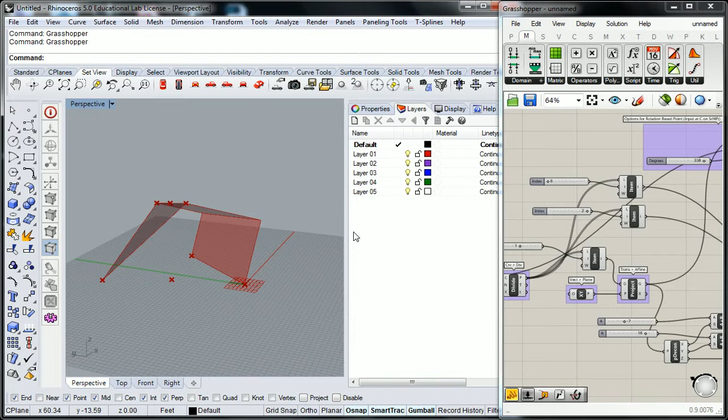So the first thing I want to do is go back into Rhino. I know this is a rarity with me, right? So go back into Rhino. We have a bunch of layers, right? I don't know if yours came up defaulting to 5 different layers, but mine did. If yours didn't, go ahead and create 5 different layers. I know you know how to do that, Jeff went through that with you before. So we're going to actually create 5 different layers.

You don't really need to know much here, you guys. What you do need to know is how to get all of your geometry in one place, and there are easy ways to do it. I'm going to give you the basic way, and there are very clever and complex ways to do it too.

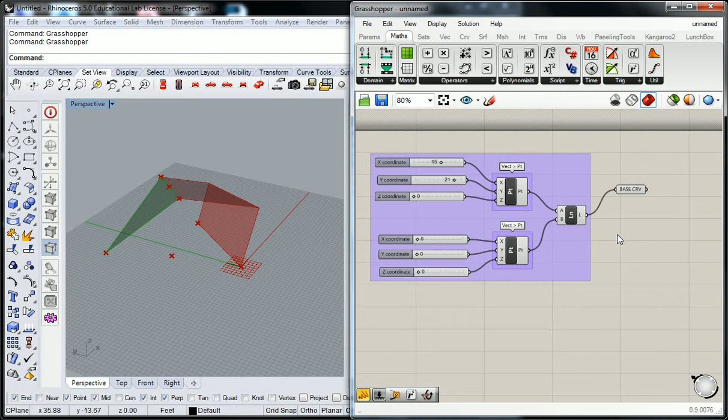But the basic way is to just grab them all and connect them to one particular component. So remember I mentioned I've got the basic geometry creation stuff up in the top corner. I do the same thing for baking geometry if it's a very simple definition, and it looks like this. So I'm going to go to params, and I know all of these are just surfaces, but generally I can do a catch-all and say geometry.

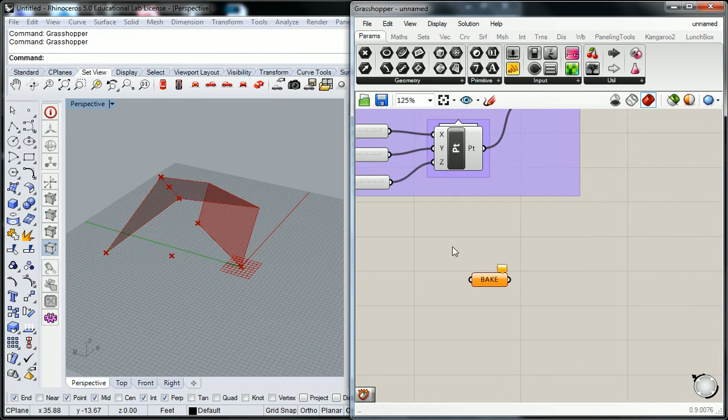And I'm going to call this one 'bake.' There are buttons and stuff you can do to bake each one individually, but this is just going to be easy for me to reference.

So now I'm going to do the same kind of wireless connection thing, but backwards. I'll take this one and set it to wire display hidden, and just go like this. Notice how when I pull it out to the side, it gives me that crazy wild wire wrapping back onto itself thing, that's why I just hide it. It's just an easy little catch-all.

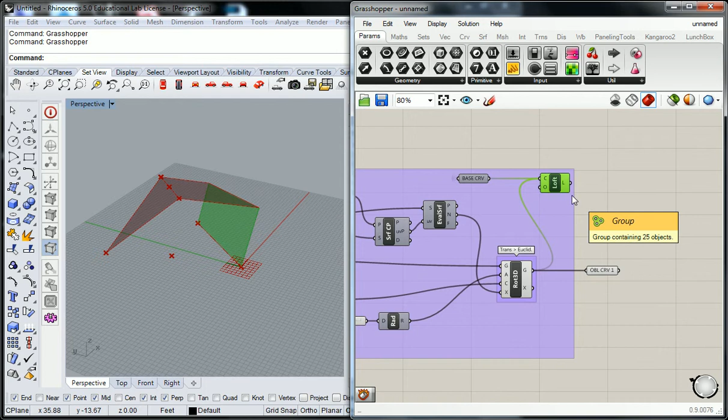So I need to bake the surfaces. That's why my geometry, the surfaces themselves, were created but not used, right? Notice how every single time I had this loft over here that was just kind of sitting there, that's the one I'm going to use to bake. So I'll pull this over here and plug that in.

Can I see a connection for baking? It's just another bake right there. Do you understand? Yeah, so it's just this. I made a wireless connection from one to the next, except I did not take this one out. I took the first one out because it's going to collect and feed backwards now.

Don't worry, there are other ways of doing this too. I'm just showing you a simple way. So I plug bake in there. I can make a copy. I'm sorry, no, don't make a copy of that. Make a copy of...

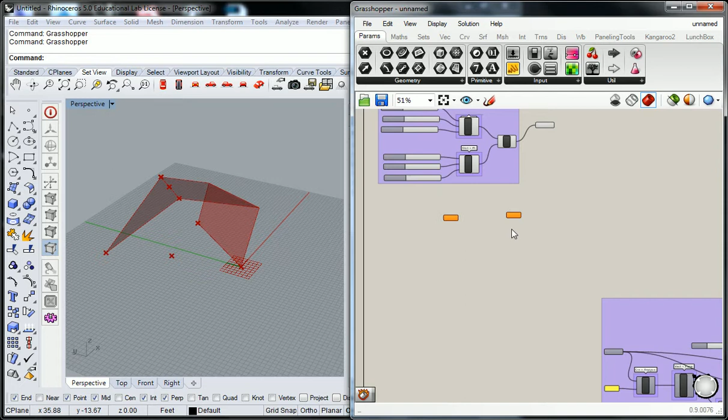Oh, I forget my workflow for that. I think I remember. When I was doing it this way, I just made a couple copies back here. So I did that, and I said copy, paste, paste, paste, paste, and I just feed them in.

Again, there are smarter ways of doing this. I'm just giving you the quick one. Wait, what? Oh, shoot, sorry. I did it wrong. You gotta hold shift.

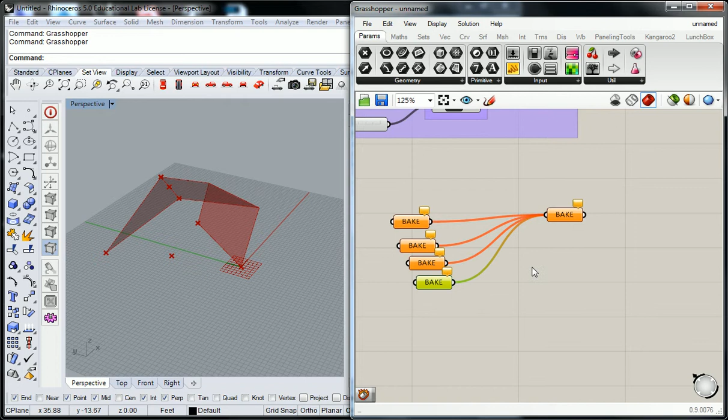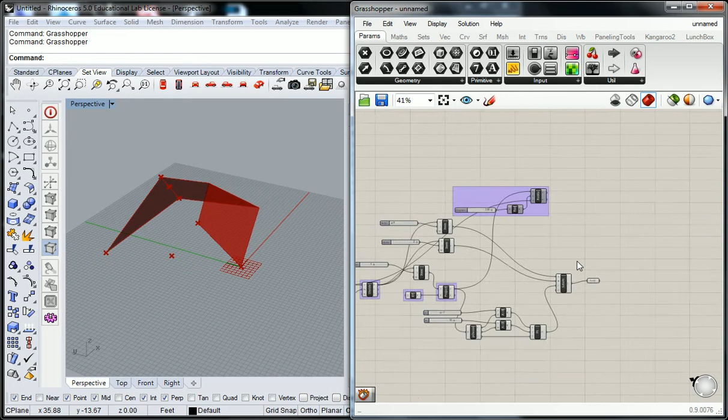Alright, so you should only have 3. You might have 4, but you can just take one of these to each one of your definitions. So I got one there, I've got one here, and I've got one that's going to be all the way over here. So this one feeds into that, this one will feed into that, and this one will feed into that.

So now when I select this bake, it selects all of that geometry. So I essentially could technically turn everything that I've created here off, even this, off, and what I see is my completed form right here.

Yes? Yes, thank you.

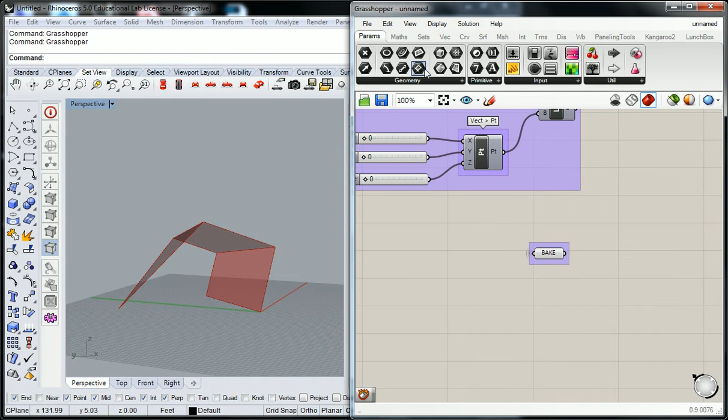So I'll go through that again so that you can see it in a little bit more clarity. I used geometry because geometry will catch any geometry that's created. It doesn't matter what type, it'll just take it. So I used geometry.

I called it bake. And the key really is your method and foresight for knowing how many connections to make. So I did it sort of as a backward wireless connection, and I connected these two like this, and I made that wireless.

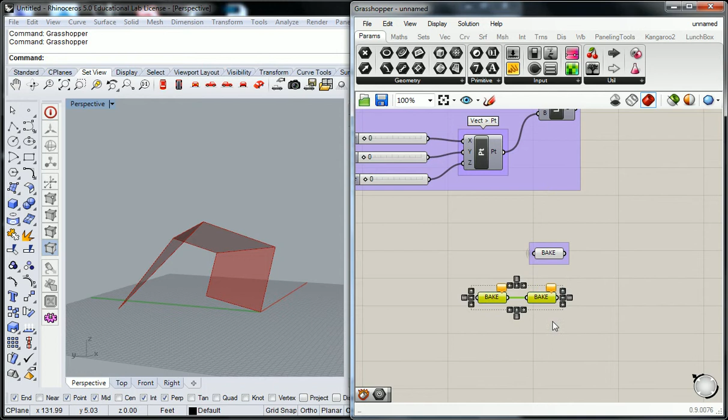Am I still going too fast for you? Or you got it? So this connected to that, it's wireless.

So then to make a few of them, I made a mistake and I just did copy, paste, paste, paste, and then those weren't connected. So what you want to do is just copy, paste, and then hold shift and put it in. So that way you've got both of them connected, and you can just carry them out to collect.

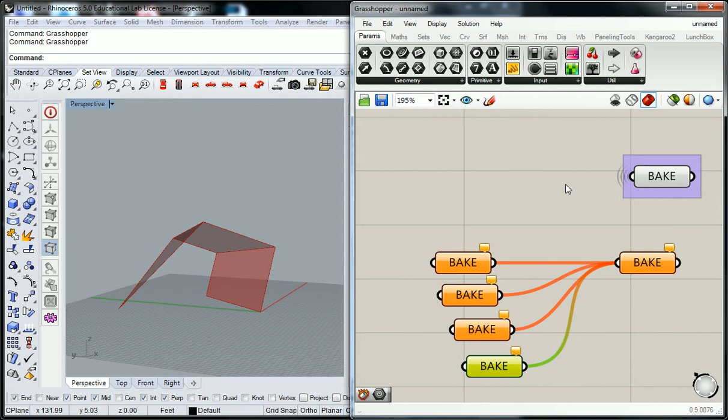This is kind of like amateur hour, but it's the easiest one to remember, I think. So now I've got a bunch of them. They're all connected. This one's going to stay as my collector. And so I'm just going to bring these out and connect the surfaces that I've created.

Okay, so I can bring them, see here, if you follow and trace them down, it's hard to see, but you know, the bake collector's up here, and I just pull each one out to where I had the loft, the surface that I actually created.

So we need 2 of them? 3. Or, well, I'll say you'll need as many of them as you have surfaces, because we created each surface individually.

And if we want, it doesn't matter whatever new plane that we make. The only thing we have to do is just plug in the previous plane into it. We just have to make sure that they're synced up. So it doesn't matter how many different number of planes that we have. We just have to make sure that one of the connections is plugged into the previous plane.

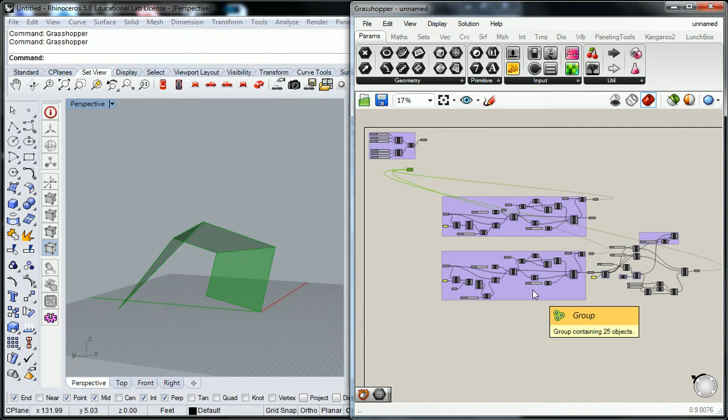So I think it's locked. No, so these lofts do not have a relationship to one another. If you follow this through, right, the oblique curve is the only one that feeds down into the next surface. This loft goes nowhere.

I put that loft there, A, because I wanted to see the surface I was making, and B, because I wanted to use that surface to bake into an actual physical surface in Rhino later.

It depends. You could, but like I was saying, the reason I use curves to rotate is because if I create a surface like that, it has a rotator here and a rotator there, and then I want to create another one that goes out this way.

The relationship of this surface to that surface is not a rotational relationship. Because if I rotate the surface, that turns this into an axis of symmetry, which means the resultant surface is going to look like this. Do you understand why?

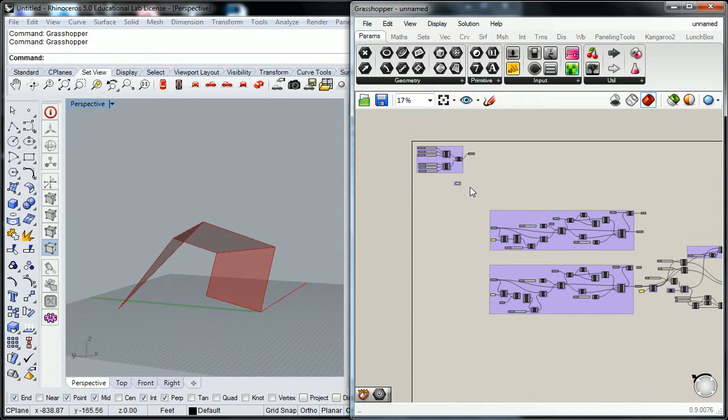Sorry, I need to do that. So basically, sorry, you guys keep asking me questions. They're good questions, but I get lost.

After you do this, the baking part is so easy, right? All of those surfaces exist right there. All you have to do is right-click it, go to Bake. By the way, I don't know why they chose an egg for the term bake, because you don't bake eggs, right?

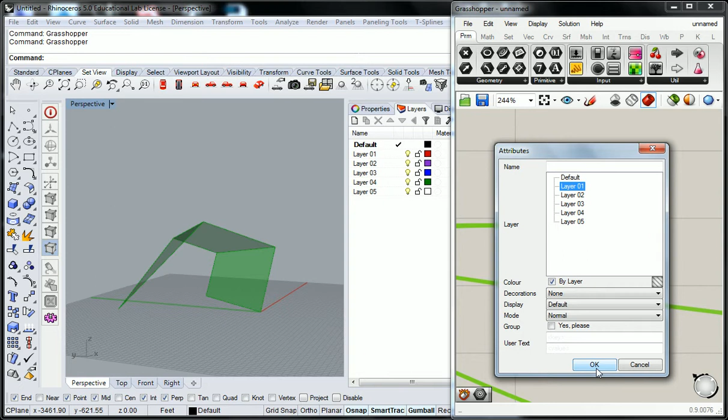All you have to do is just pick the surface it's going to, and then it'll assign that version. It'll bake it out into that particular... did I say surface? Pick the surface it's going to? No, pick the layer it's going to. My bad, working in Grasshopper too much.

So now you see it actually created that surface. If I turn this off, you'll see the geometry in Rhino. There you go, so the geometry here is in Rhino. So the very quick and easy way of doing this, it becomes so easy.

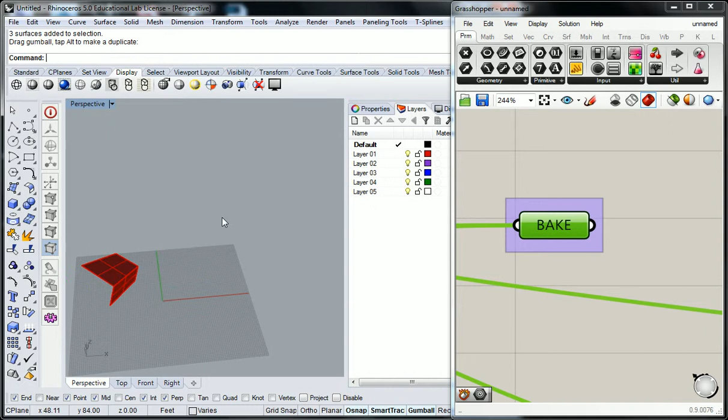So I'll do them all really fast. I grab those and pull it off to the side. So you just grab the surfaces and pull it off. Then I can go back to all of these sliders, right? So let me turn the bake on so I can see what I'm doing.

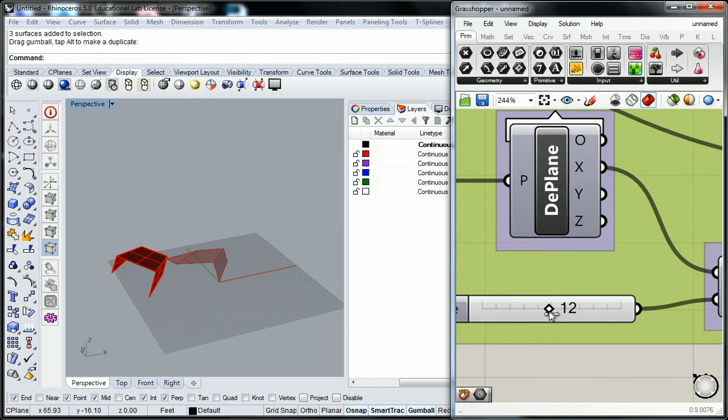Turn this on, go in here, and I can just start playing with the sliders. So I change my rotation angle here, change my amplitude there. I can play around with what the degrees is for the second surface rotation.

So that's how you want us to make your iterations, just playing with angles? Yep, play around with it. I can make this one really short and then turn my angle down or up.

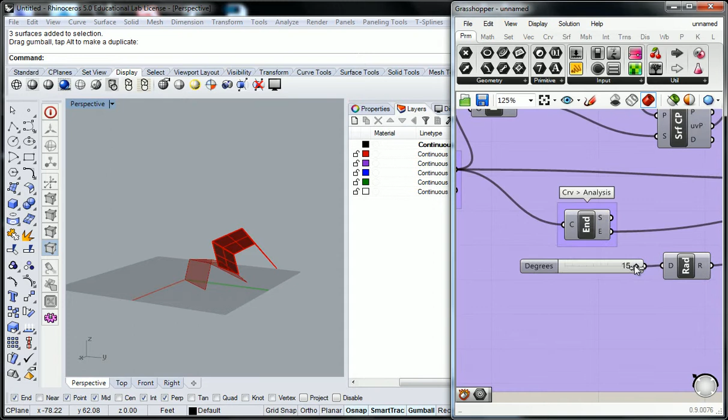Okay, so that would be another iteration, right? I can keep playing around with that. Then I do the same thing, I go back to Bake, and I go to Layer 2, hit OK. So now I've got it living in Rhino. I pull it out, there we go.

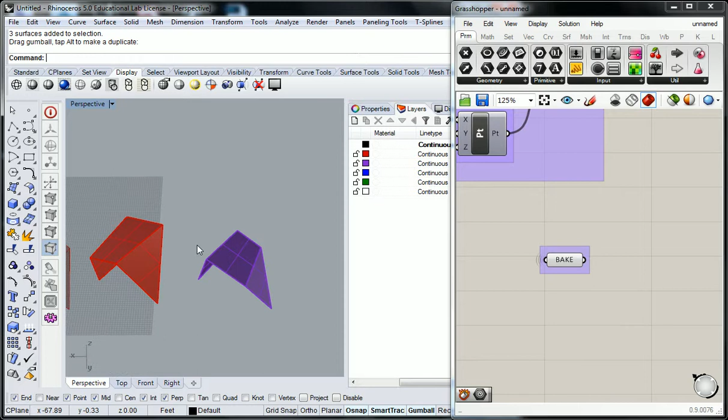So I want to see 5 iterations of this, and I want you to play around mostly with, it's probably more interesting for you to play around with the triangle at the end, because the rest of it isn't super exciting. But the triangle kind of is.

So let's do that. I want to see 5 iterations if you can get them done by the end of class today. If you're still working on the definition, you might only get 3. But try to get them out because we're going to use this to laser cut. It looks like we probably won't be able to do the pattern in time to laser cut tomorrow, so maybe we'll do it next week. Are there any questions?